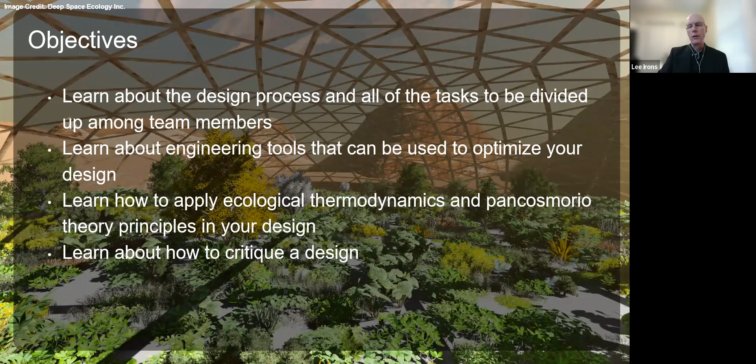Recall from my presentation on Monday that we defined human sustainability as the degree to which an ecosystem supports human life and human enterprise under nominal and potentially abnormal human activity in the course of expected and unplanned events. This definition will be broken down into elements that will help you improve your design. These are listed on the slide. I will use the terms on this slide throughout the remaining slides to help you understand how to design for sustainability.

The challenge is for you to design a ground system that will enable you to complete a mission on the surface of Mars. Toward this end, let's start to learn about some engineering tools for conceptual design work. Conceptual design is the initial part of every large engineering and design effort. During conceptual design, you do not go to the level of detail necessary to actually start building the design. You do go into enough detail to make some decisions about what will be a part of your design and what will not be a part of your design. You also begin to conceptually sketch about what the design will look like.

The first tool to learn about is to identify your mission objectives and operational requirements. You must decide what your mission objectives will be. There are likely some interesting science missions you could do that you learned about from some of the other presenters or from some other sources. A mission objective might be something as simple as perform rock and substrate sampling of Utopia Basin. Another type of mission you might do is to prove out some technology that could improve human capabilities for future missions. You can have as many or as few mission objective statements as you wish.

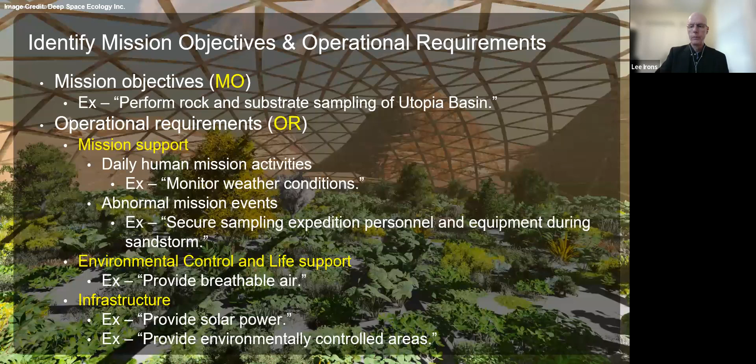The next engineering tool and step in the process is to identify design objectives. Design objectives are both limitations that are put on the design, as well as things you could do to improve the design. A delivered mass limitation has been put on this mission, so reduced need for delivered mass is a design objective.

You might find yourself later in the engineering process exceeding this limitation with all of the operational requirements you are trying to meet. So you will need to find ways to modify your design to reduce the delivered mass you will need to use to be under this limit. As you develop the design, you should be looking for ways to reduce the amount of mass delivered from Earth that you need to accomplish a design that meets operational requirements.

Reduced staffing could be another one, because the fewer humans that are required to go, the fewer life support resources will be needed, which also helps reduce delivered mass usage. Reducing human time on Mars can also reduce the need for mission resources and delivered mass.

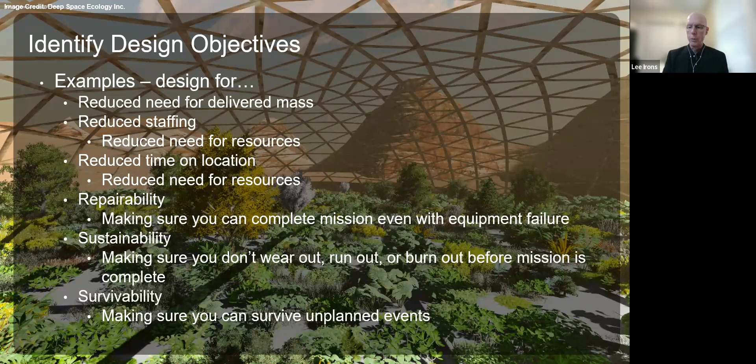Three additional ones I would like to mention are repairability, sustainability, and survivability. Repairability is making sure you can complete a mission even with equipment failure. Sustainability is something I talked about on Monday. This is making sure you don't wear out, run out, or burn out before the mission is complete. Survivability is making sure you can survive unplanned events.

With design objectives identified, you can return to your operational requirements and consider modifying them or adding to them based upon your design objectives. With a design objective to reduce use of delivered mass, you could add infrastructure operational requirements to provide in situ agriculture, to provide in situ resource utilization, provide in situ manufacturing, or provide in situ waste recycling. And of course, provide access from inside your containment to the Martian surface so that you can gather the in situ resources.

With a design objective to reduce staffing, you can add infrastructure operational requirements to provide robotics. With a design objective to reduce time on location, you can add an infrastructure operational requirement to provide robotic construction and preparation for pre-human arrival setup. For repairability, you can add providing maintenance supplies and repair parts. Note that this can be done by using up some of your delivered mass for shipping maintenance supplies and repair parts, or it can be done by providing in situ manufacturing.

Consider the sustainability design objective. I taught you last time about levels of sustainability. If you are going for level 1 sustainability, then you are wanting to provide in situ provisioning services for human use in order to reduce your need for delivered material from Earth.

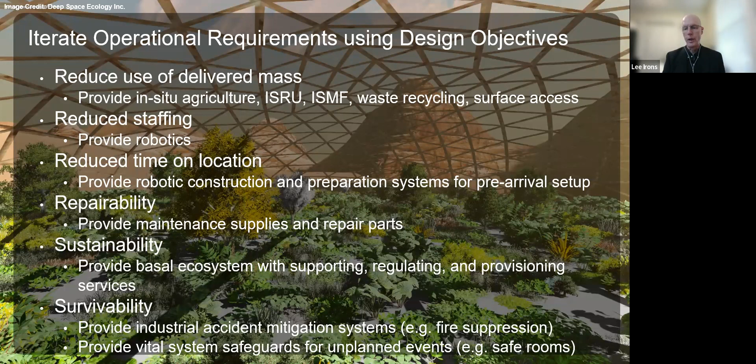At this point, your design objectives might have enabled you to identify a very unique mission objective, to test a new and innovative technology or approach. It is okay to iterate at any time and modify your mission objectives. Your refined mission objective might involve testing in situ resource utilization or in situ manufacturing technologies. You could even have a mission to perform a sustainability test as identified in the pancosmorio theory paper I presented to you on Monday.

Consider each operational requirement to be a problem you are trying to solve using technology. Try to identify at least 3 system solutions for each operational requirement. This will help later during trade-off analysis, as well as for redundancy and reserve systems to meet sustainability design objectives. A system can be something that someone else has already designed. A system can also be a combination of multiple existing system designs that you are going to try to fit together in a hybrid design.

A system might also be something that you would need to design from white paper in later design phases. But it is just a concept for now. Usually, standard engineering discipline can make any of these approaches work. Systems frequently are best identified by the special component technology that they use. So if you can identify 3 unique technologies that enable meeting an operational requirement, then you have effectively identified 3 systems.

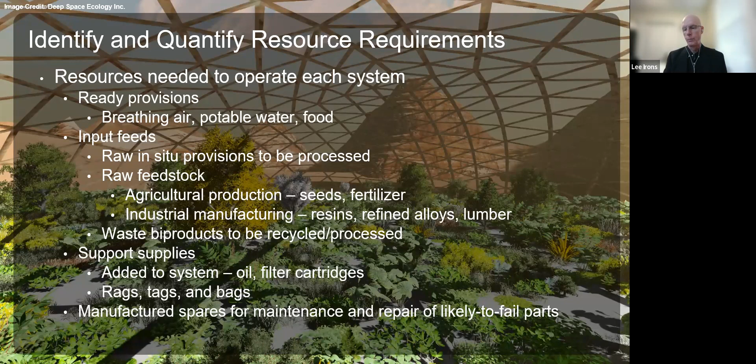For each system solution, it is now time to identify and quantify the performance requirements. These are the products or services that systems provide and the quantities at which they provide them, the qualities at which they provide them, and the resources they need to be able to provide them.

You are in the conceptual design phase for this competition, so these things don't have to be exact. They are the things that you believe to be correct, though the information you have gathered in the short time you have, including the numbers, are just estimates. Keep in mind how accurate you turn out to be can help you in later phases of design. A thumb rule is to shoot for plus or minus 40% on your accuracy during conceptual design.

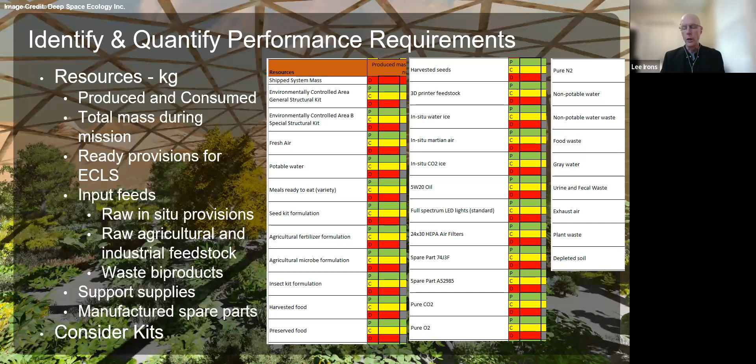Finally, we have performance requirements of power, staffing levels, installed area footprint, and environmentally controlled conditions. Power can be produced by a system and consumed by a system. Some of your operation requirements involve systems that produce power. Keep in mind, such systems consume power as well in order to produce power. Others of your operation requirements involve systems that only consume power. For each of your systems, identify the number of watts the system provides, if any, and the number of watts it consumes.

Another performance requirement considers staffing levels. As with power, a system can support staffing levels and require staffing levels. Your ECLSS system supports staffing levels, but as with power supply systems, they can also require staffing levels. Required staffing levels are the effort required by the mission staff to operate and maintain the system. I recommend you estimate these numbers in person missions.

Next, we get to the installed area footprint and environmentally controlled conditions. As with power and staffing levels, a system can support installed area footprints and require installed area footprints. We are calling systems that support installed area footprints by the term environmentally controlled area. Each separate environmentally controlled area system that you need to meet operational requirements will be based upon the environmentally controlled conditions that all of your other systems require.

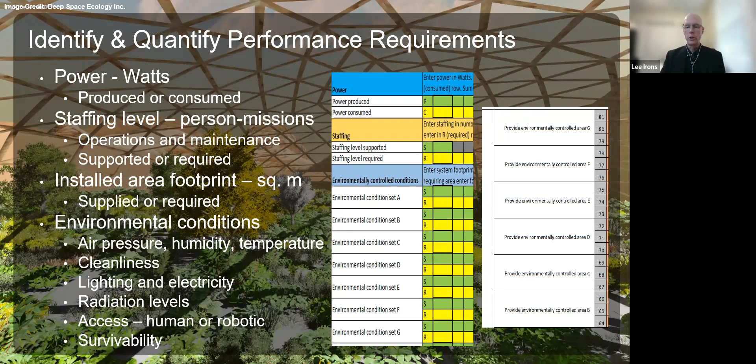System options to consider for environmentally controlled areas can include above ground and below ground spaces. A couple of meters of regolith overhead could help you achieve some environmentally controlled conditions better than building a structure from delivered or in situ materials.

For each system option, you will put the power produced for power systems in the P row and the power consumed in the C row. Power numbers are in terms of watts. You will also put the staffing levels supported in the S row and the staffing level required in the R row. Staffing level numbers are in terms of person-missions.

For environmentally controlled areas, you will put the area supported in the S row if it's a system that is an environmentally controlled area system, and the area required in the R row of the applicable environmental condition set, if it's any other system that requires the use of area. Area numbers are in square meters.

Finally, for each system option, you will need to put the shipped system mass in the red D row. D stands for delivered mass. You will then put the resource produced in the P row of each applicable resource and the resource consumed in the C row of each applicable resource. Resource numbers are in kilograms. Notice that there is also a D row for each resource. I will tell you what to do with that shortly.

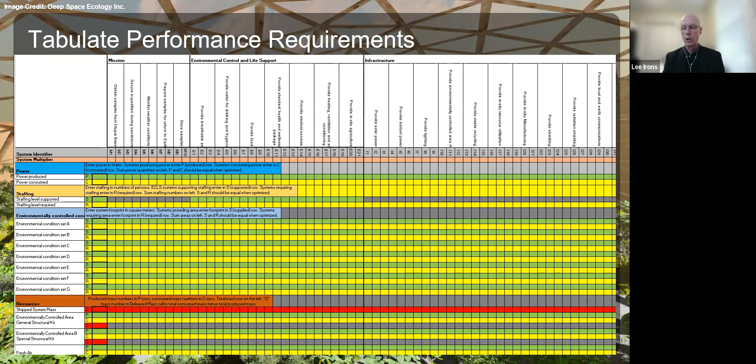Now that you have tabulated your system options to meet your operational requirements and all of their performance requirements, let's look at the architectural analysis tool. Architectural analysis is the next engineering tool you can use to help you understand and improve your design. Based on the resources that systems are consuming and producing, use an architectural analysis to make connections between systems such that every performance requirement of every system is being met by delivered mass or by another system you are providing on Mars. Here's an example of a conceptual architectural analysis.

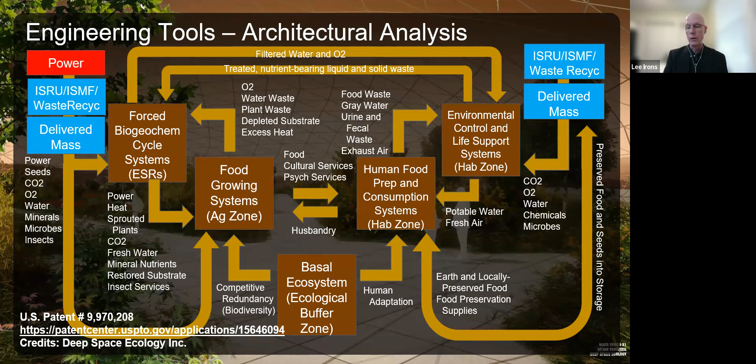Have fun with the architectural analysis effort. You can start with something called a rich picture before you move on to an architectural analysis that I showed you in the last slide. You have maybe seen these on YouTube. Once you have a rich picture, you can start to do something that looks more like the previous slide.

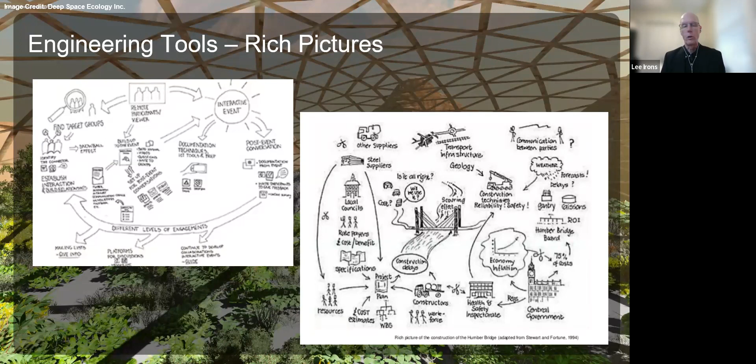The architectural analysis will help you utilize the table you have built on a spreadsheet. The table is what we call a trade-off analysis table. For each operational requirement, look at the performance requirements of the system options and compare them to each other. You should see that each system option has its own pluses and its own minuses. What you are looking for is what you might call bang for the buck.

The best systems have high production numbers and low consumption numbers. They also have low staffing levels required numbers and low environmentally controlled area required numbers. But no system option is ideal in all cases. Each system will have those things it performs well at and those things it does not perform so well at.

Using these comparisons, you will first need to select what you feel to be the best system option for each operational requirement. Put a number 1 in the system multiplier row below the selected system option for each operational requirement. The system multiplier row is that brown row just below the system identifiers.

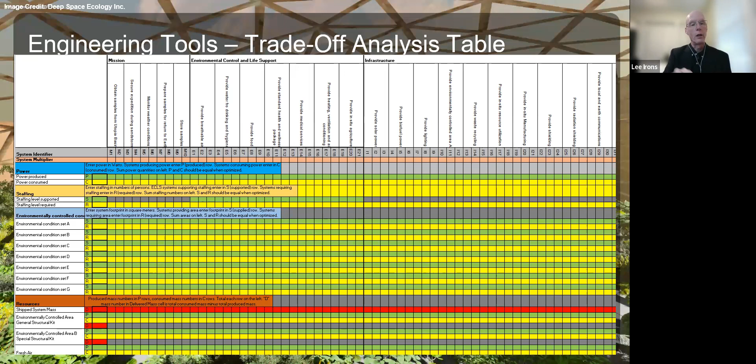Next, let's consider the sustainability design objectives. For sustainability, an important aspect is to prevent burnout. Recall from my presentation on Monday that burnout is when a system fails even though there is plenty of power available to run it. The goal is to set up an organization of systems to support each of the most vital operational requirements. You do this by considering network vitality and functional diversity.

For sustainable network vitality, consider selecting 2 or 3 independent system options per operational requirement to handle 60% of the production for that operational requirement. That would be 40% nominally with 20% surge load capability. The selection can be one of the system options you did not select during your down selection process when you did the comparisons. It could also be the same system option, but simply be a redundant system.

If you wish to have 1 or 2 redundant systems with the main system you have already selected, change the number 1 in the system multiplier row to an A2 or an A3. The letter A stands for ascendancy. This is the network vitality that we're flagging it as supporting.

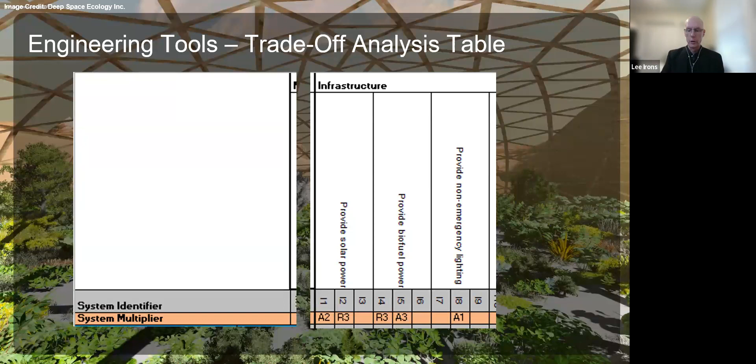Some things to keep in mind if you're providing a full basal ecosystem: make sure it has at least 60,500 square meters per person, in keeping with the pancosmorio theorem. It is okay to be less than this if you are not trying to accomplish a full basal ecosystem as part of your operational requirements. Also, make sure the power to support your basal ecosystem is correct. This equation will help you do that.

For Mars, the solar distance ratio is about 1.5. Your objective is for the value you calculate on the right side of the equation to be greater than or equal to 1.5. The closer you are to 1.5, the less overproduction of power you are doing. The right side should not be more than 40% greater than 1.5 for conceptual design.

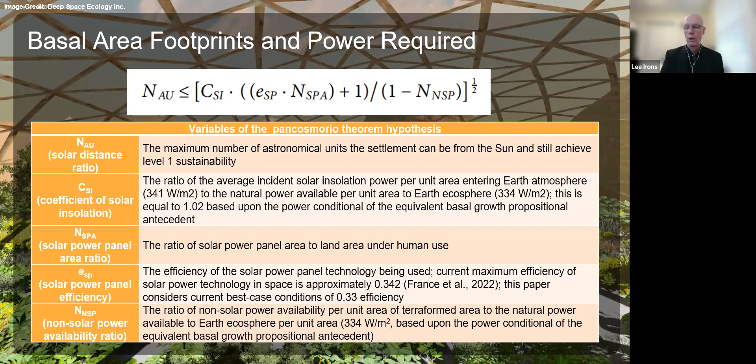We are going to sum up all of the performance numbers for power, staffing, and environmentally controlled conditions and resources. This is done by multiplying each performance number below each selected system option by the number in the system multiplier cell, and then adding up all those multiplied numbers in each row, placing the sum number in the bold box next to the column with the P's, C's, S's, and R's.

Now the fun begins. For every C quantity of a resource for which there is a lower P quantity, you either need to increase the system multiplier of another system to provide the needed additional P quantity sum, or you need to add new operational requirements for additional in situ resource utilization, in situ manufacturing, or waste recycling, and identify some system options to provide those additional P-value sums.

Put a D quantity in the delivered mass column bolded box below the C if you cannot come up with enough P-value to meet your C value. The sum of the delivered masses in the red bolded cells cannot exceed 30,000 kilograms. For conceptual design, the sum should be within plus or minus 40% of the delivered mass limit.

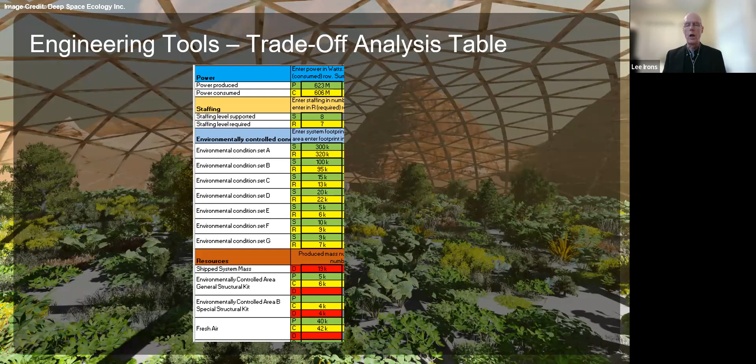Remember that if you modify ECLSS system multipliers, you need to recalculate the sums for all the performance requirements. This could unbalance your resource numbers and cause you to have to rebalance them. Follow this same process to get your power produced number in the P sum bolded cell to be equal to the C sum bolded cell within plus or minus 40%. You are now at the point where you need to continue to tweak the numbers until everything is balanced within plus or minus 40% for conceptual design, but at any rate, as close as possible.

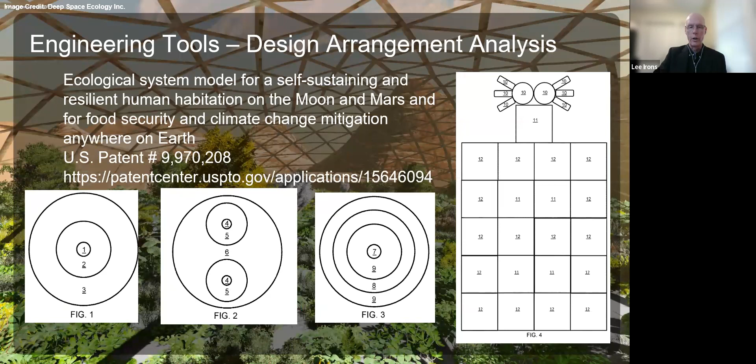The last tool I will show you is the design arrangement analysis. This is where you conceptualize the layout of the architecture with all of the systems. The simplified examples I am showing you here are from the patent I previously mentioned. You could find other ideas online or develop your own. Things to consider for your design arrangement. Draw a two-dimensional layout. If multiple levels are used, draw a separate layout for each level. Consider the total area footprints of the environmentally controlled areas.

You can have each type of environmentally controlled area in a single contiguous space, or you can break it up and spread it out. For environmentally controlled areas that house vital systems, breaking them up and spreading them out helps with survivability, one of the design objectives. For systems that are connected according to your architectural analysis, but are in different environmentally controlled areas, the closer the environmentally controlled areas are to each other, the less piping and electrical and communications conduit and other materials you need to connect them, which will help you stay within your total system mass estimates.

Consider industrial accidents that could happen and the proximity of vital systems to places where industrial accidents could occur. Put some space between such areas to help with survivability. This is called using distance as a safeguard. Consider putting the ascendent systems for an operational requirement in a separate location than the reserve systems. This also helps with both sustainability and survivability. There are many other things to consider. Hopefully the advisors and coaches that you will have will give you some ideas and tips that you can use for your design arrangement.

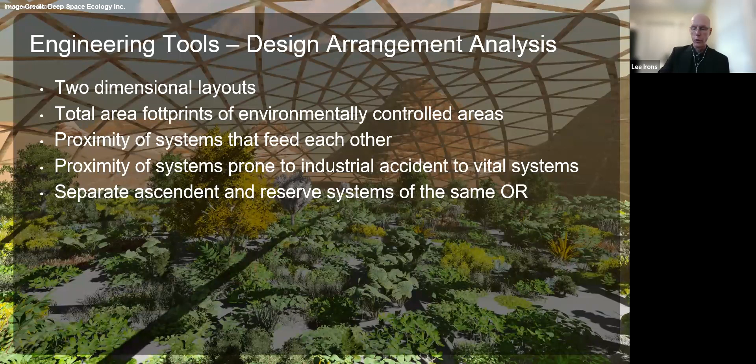Now we get to the final part, critiques. How do you rebut other people's critiques of your system? Show how thorough your operational requirements are and how you will not discover once at Mars that you did not plan for some operational need, like food. Got to make sure you have food. Show how you identified and met your design objectives, such as delivered mass limitations, reduced staffing, reduced time on location, repairability, sustainability, and survivability, as well as any other special design objectives you identified. Show how you have designed the system to not wear out, run out of power, or burn out, and how it is protected from unplanned events.

Show how your architectural analysis helped you meet the design objectives and helped you refine your operational requirements. Show how your system selections and trade-offs put you within plus or minus 40% of all your performance requirements. This means that your plans are balanced. Explain how these numbers are conceptual design numbers and will be refined to eliminate shortages and overages as you proceed through to detailed design. Show how your design arrangement takes into consideration the various different environmentally controlled areas, proximity of interconnected systems, and survivability against industrial accidents and unplanned events. To critique other teams' designs, show how they don't do any of these things or some of these things.

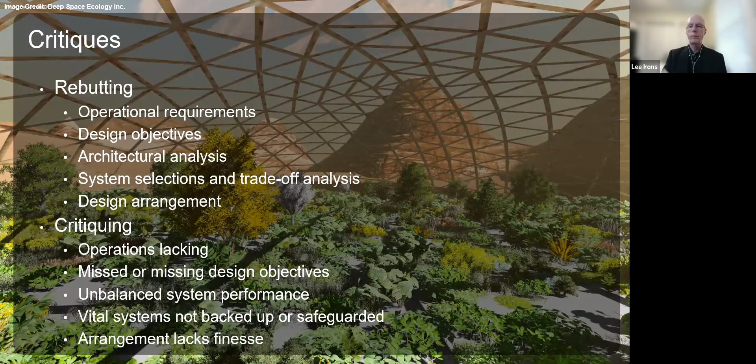I know this might have felt for some like trying to drink from a fire hose. You might not do all of these things, but that's okay. Have fun and do what you can. Just remember that you have a team with team members. Divide up this work amongst all of you and work together to complete these tasks. Trust each other to get the work done, and then help each other to refine your individual results to improve the result of the team. All right, that's the talk. Question time.

Thank you so much. That was so informative and helpful, helping the students structure how they're going to do things. Wonderful.

Question: can you talk about the importance of in situ resource utilization of water and minerals and the regolith for a human mission to Mars? Right, so in situ resource utilization of water is really important. That's because water is relatively heavy and difficult to ship because it's also bulky. By bulky, I mean it sloshes around, right? Trying to stick a big tank of water on a rocket and bring it with its tendency to slosh or to freeze and expand, it becomes really difficult to manage shipping that from Earth. So getting water on Mars is important from that perspective.